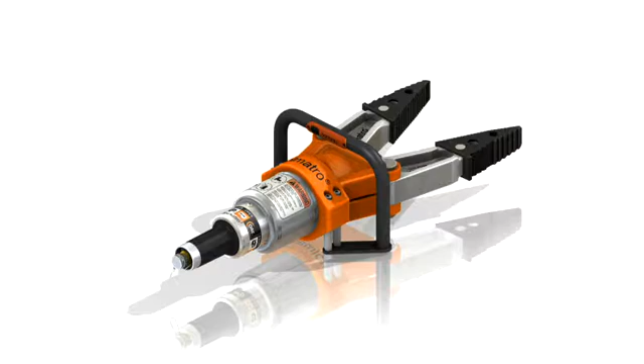With rescue equipment like this, performance is everything. The product must work reliably every time. SOLIDWORKS contains a powerful set of tools we can use to test out the performance of a design in many different ways. Two key areas that concern most designers are function and strength. Let's look at how SOLIDWORKS Motion and SOLIDWORKS simulation tools can help us evaluate these goals.

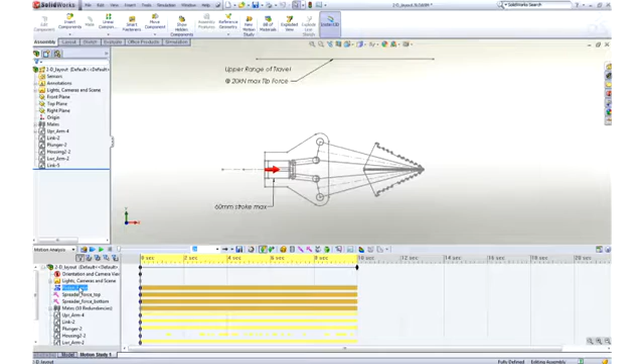We've seen how we can assemble our design in SOLIDWORKS, but how do we know it's going to function correctly? It's invaluable to be able to validate the spreader operation without the need to cut metal or build prototypes, like in the case of this sketch layout concept. With SOLIDWORKS Motion, we can easily test our design during the early stages of development to aid in sizing parts, bearings, motors, and actuators to ensure they meet our design goals.

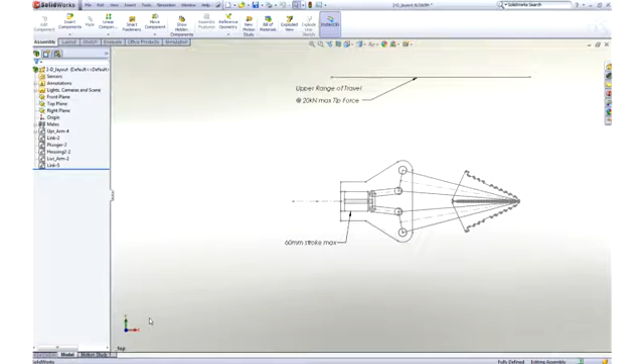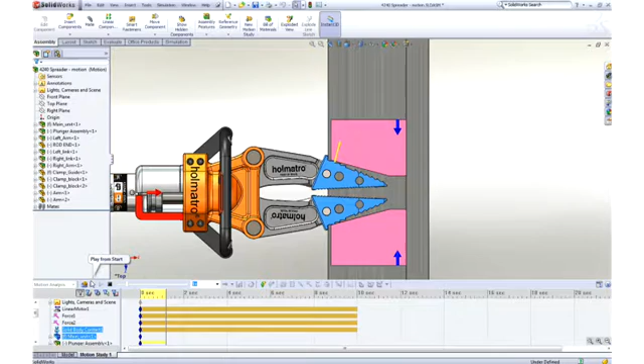As we go through and refine our design, we can continue to use motion to validate the function. Here we have a test fixture to determine the piston force required at different jaw openings to meet a minimum spreader force requirement. In SOLIDWORKS Motion, we need only apply an actuator to drive the piston through its range of movement, the desired spreader force on both blocks, and finally specify that the tips of the jaws and the blocks will contact. An accurate physics engine then calculates the resulting motion, forces, velocities, and accelerations.

We can look at a wealth of engineering data such as the bearing loads on the pins, how quickly parts are traveling, and so on. With the built-in plotting tool, we can quickly show the required piston force with respect to the open position.

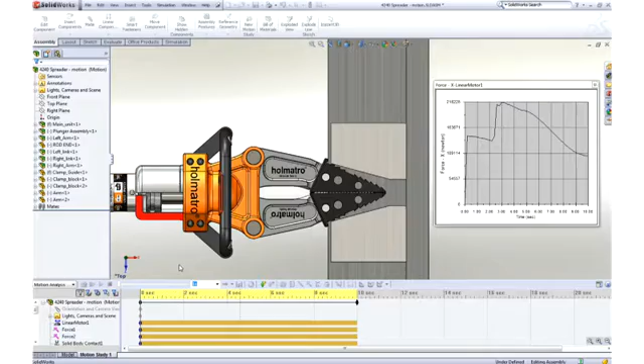We're even able to check the strength of selected parts in the mechanism over the entire range of motion. This can really help in determining if we need to use SOLIDWORKS simulation for a more in-depth analysis to ensure that part strengths meet our goals.

Let's now focus in more detail on the structural aspects of our design with SOLIDWORKS simulation. If we're concerned about parts failing, deflecting too much, or reducing weight, this is the tool for the job. Simulation can be used from the part level all the way up to the complete assembly to easily identify if the design will meet our needs.

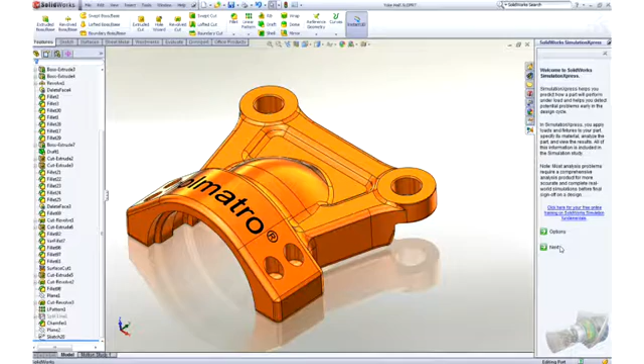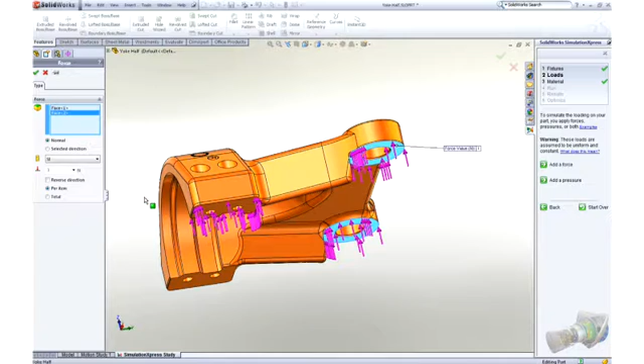You set up the model just like you would when doing an experiment in the lab. We start by using fixtures to hold a part in place. We make selections just by picking on geometry. It couldn't be simpler. We then apply loads to test if our part is going to fail or deflect too much. Visual feedback on the screen makes it very easy to understand how we've set up our test. The checklist on the right-hand side makes sure that you have everything ready to test out your design's performance.

After the simulation has run, you get immediate visual feedback on how the part is trying to deflect, which is great to confirm the test is set up correctly. It's easy to verify the factor of safety, stress, and deflection of the component.

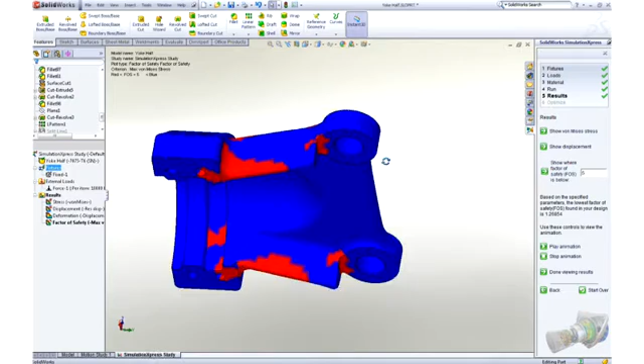Simulation also allows you to look at many design variations very quickly with design studies. In this case, we want to optimize the pocket size to reduce the weight of the arms, but still ensure we meet the rigors of ripping open cars. The slider interface makes it incredibly easy to compare designs and find the right one to save the most weight.

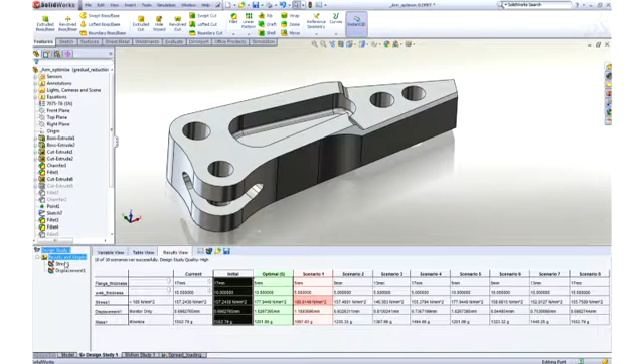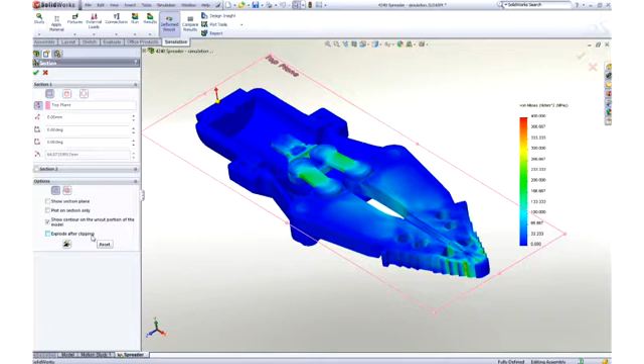SOLIDWORKS simulation also enables us to look at the entire design and understand how load is transferred between parts, as well as where the critical areas of the design are located. In this instance, we're looking at the loads through the entire spreader. A force has been applied to the hydraulic piston and the tips of the arms are being held in place. We're even able to slice through the model to look at any internal sections. Results update dynamically for immediate feedback.

With SOLIDWORKS simulation, you can even look at vibration, heat, material yield, durability, and many other types of tests.

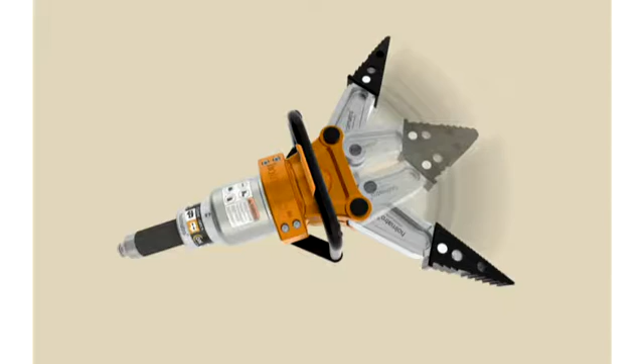With SOLIDWORKS Motion and SOLIDWORKS simulation, you can test your designs before you build them, cutting down on prototypes, helping to make sure it will work the first time, and reduce the time it takes to reach production. This has been your first look at SOLIDWORKS simulation.